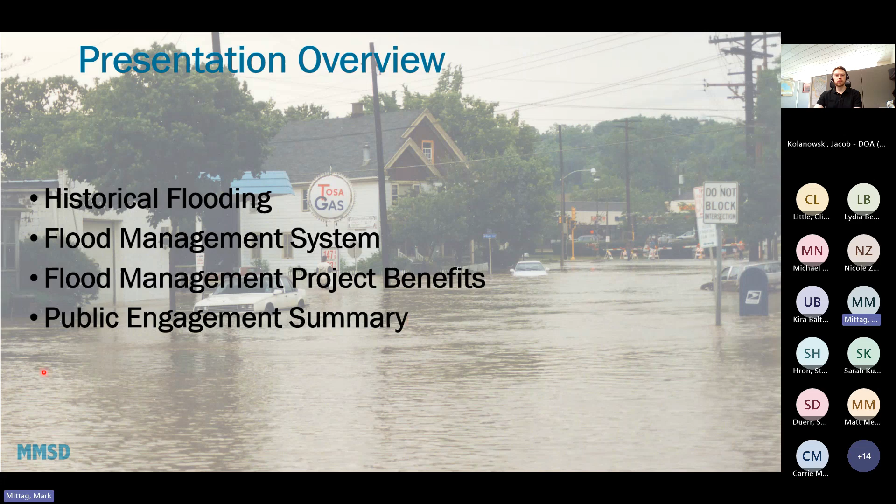The background of this slide is from 1997 flooding. Let me just grab the laser pointer. Tosa gas station in the background here. Remember that this is at 68th Street on the Menomonee River. In the background here is State Street, and we'll see how this area changes over the years.

Again, the Hart Park neighborhood in Wauwatosa has a long history of flooding. These photos are from 1997, and I'd like you to recall them in some future slides and look at other flooding photos. On the left side here, this is a neighborhood at 72nd and Chestnut, which is in what's currently Hart Park. The upper right-hand corner is the Sears Warehouse along State Street at approximately 60th Street, and lower right here is a stadium in Hart Park.

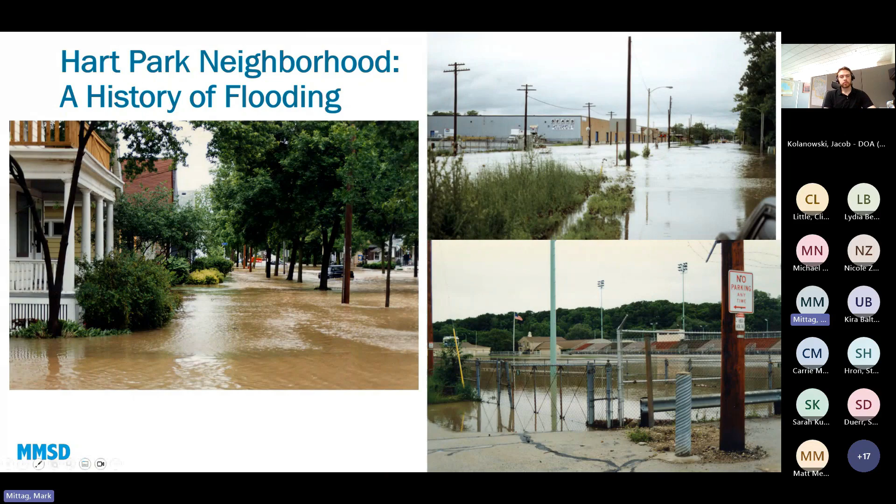This picture also is from 1997, and the 1997 flood combined with another significant flood in 1998. Really, these back-to-back flood events were the impetus or catalyst for the City of Wauwatosa and MMSD to collaborate together to reduce flood risk in the neighborhood.

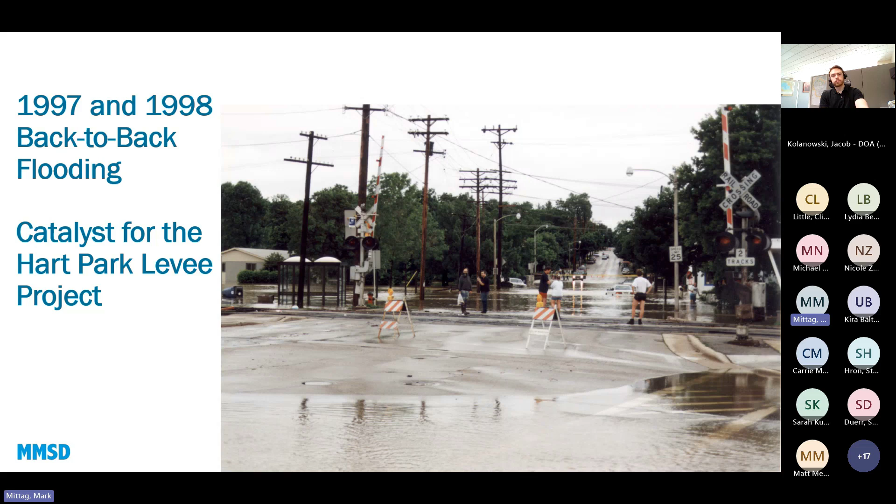To reduce flood risk along the Menomonee River, an alternative was selected that includes upstream flood storage on Milwaukee County grounds, property purchases, and levee construction. Construction of the Hart Park area levee was started in 2005, completed in 2007, and other levee segments have been constructed over the years. Currently, the last gap in the levee system is what we call the Western Milwaukee Phase 1B project, which is under construction, although we do have additional levee improvements and maintenance planned in the future.

This is an overview of MMSD's flood management system, and I'll walk through what these different features are. Further upstream, we have the Milwaukee County Grounds Flood Storage Facility. I shared a few flooding photos in the Hart Park area that integrates from Wauwatosa into Milwaukee, so we have the Hart Park and Western Milwaukee levee system, and then a separate downstream system is the Valley Park levee, which is fully completed and has been accredited by FEMA since 2006. To date, MMSD has spent over $300 million to reduce flood risk along the Menomonee River.

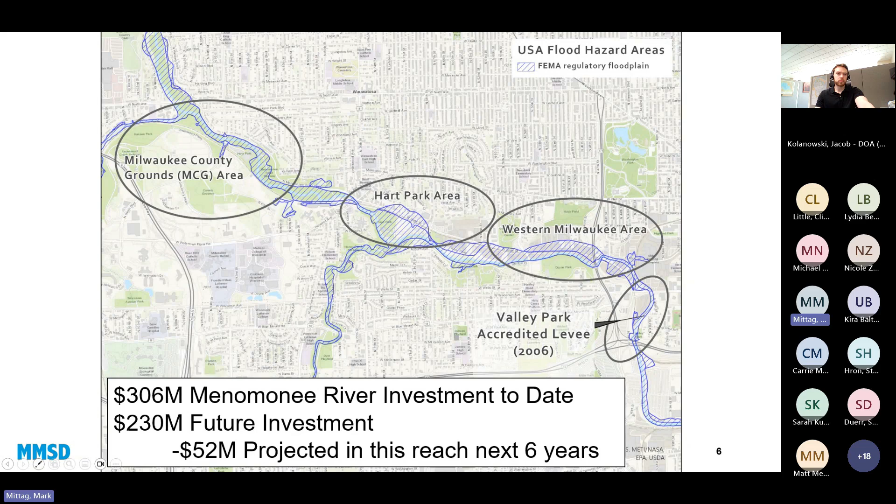There's much more budget in the future, including $52 million over the next 6 years to finish up the levee system and make some required improvements. A bunch of the additional funding beyond that $52 million is to go further up in the watershed to remove concrete lined channels, legacy infrastructure like that, and fund some additional upstream flood risk reduction projects.

So I'm going to walk through, from upstream to downstream, this different infrastructure and the benefits it provides to reducing flood risk, as well as ancillary benefits of nature and recreation that we collaborate with partners on.

This is a graphic of the Milwaukee County Grounds Flood Storage Basin. I'll just explain what it is. This is Underwood Creek. Underwood Creek flows into the Menomonee River and then downstream into Wauwatosa and the Hart Park area.

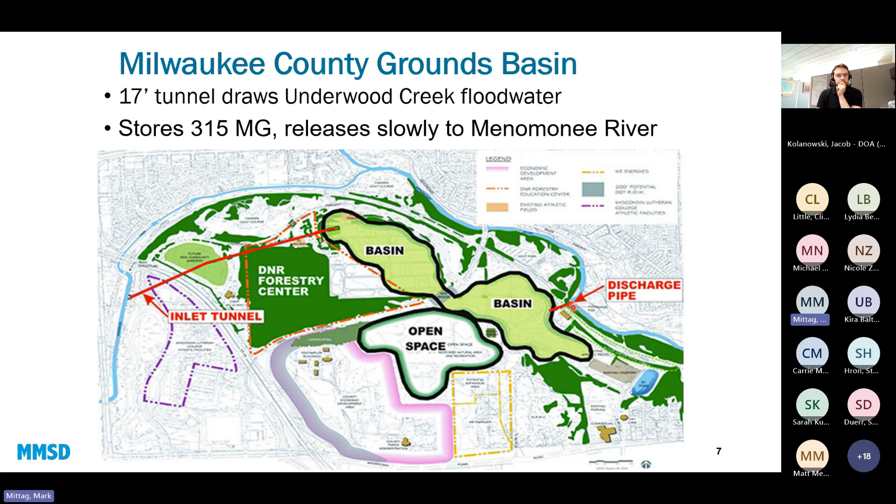There's a large inlet, shown in the next slide, and a 17-foot diameter tunnel that carries flood flows from Underwood Creek to these two large basin lobes that can store 315 million gallons. During flood flows, peak flows are taken off Underwood Creek, stored in these basins, and released slowly so that they reduce flood risk downstream.

This system worked well in the floods. The basin ended up about half filled, with 160 million gallons of storage. Some people ask why it wasn't entirely filled, and that's simply because of the way the storms hit the Milwaukee County area — the southwestern part of the county, which drains to Underwood Creek, didn't get rains as intense as elsewhere. Overall, this part of the system performed as expected.

As we move further downstream along the Menomonee River, we come to the MMSD levee system. So briefly, what does a levee do? A levee holds back floodwaters. It can be built of earthen embankment, as shown here on the left, at River Parkway and approximately 63rd Street in Wauwatosa. It can also have reinforced concrete portions, or flood walls.

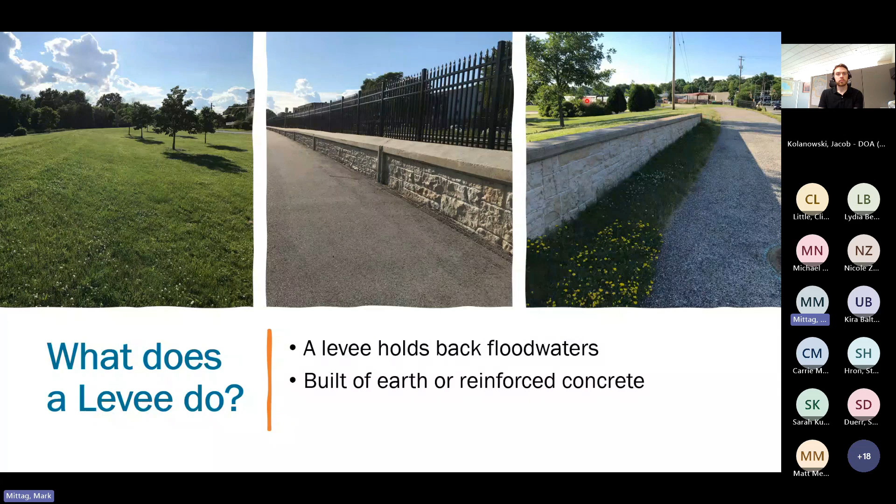This is along Hart Park Lane in Hart Park. This photo shows a reinforced concrete flood wall that transitions to an earthen levee, right in the area of that Tosa gas photo from years ago.

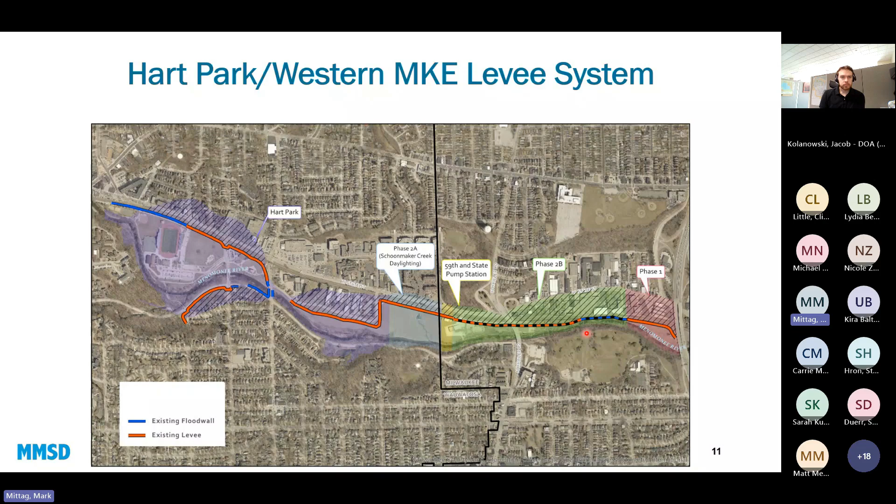Briefly, here's how the levee system works together for the Hart Park and Western Milwaukee levee system. In blue are reinforced concrete flood walls, and in red is earthen levee embankment. This is the Hart Park area, in Hart Park East, transitioning into the City of Milwaukee at this dark line. This is the Western Milwaukee Phase 1B levee flood wall project area, currently under construction. The levee system ends here at Highway 175.

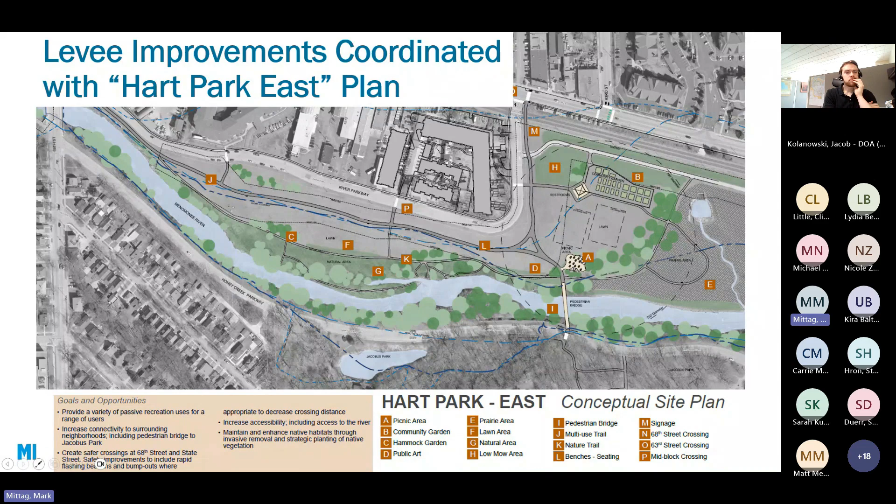During last August's flood, I just want to briefly mention some things that happened, how it performed. Overall, the system performed as expected. There was some minor levee overtopping in an area where we do have some planned improvements, and it did show some areas where we have planned improvements, and the reason for that.

This picture here is in Hart Park, right next to that Tosa gas location. It's an area that's designed to flood. This is the 68th Street Bridge, and again, where that Tosa gas picture was taken from. And of course you see here the stadium flooded. This, again, is an area that's planned to flood with the levee design.

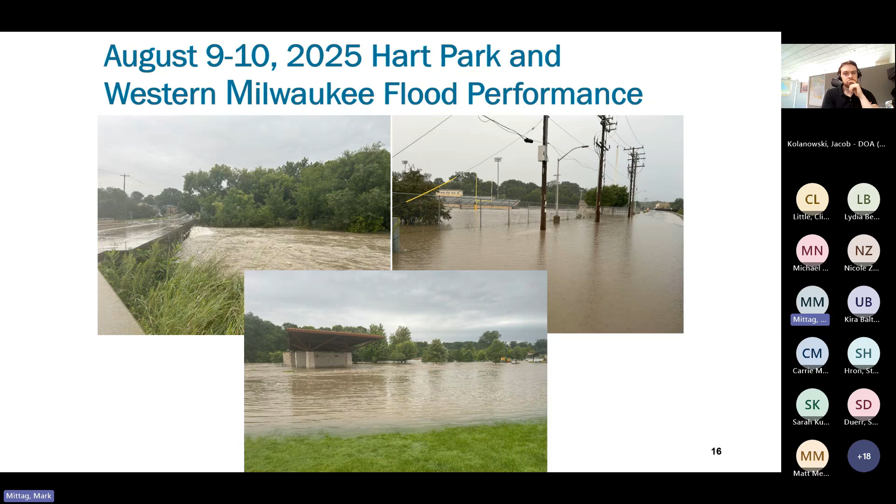One item I want to point out again is this neighborhood. This is a 72nd and Chestnut photo from the earlier flood, and this is just from last year. The picture's taken from this vantage point pointing southward. I share this photo simply because it illustrates to me the benefits of converting this neighborhood to a park area, adding the levee system, and reducing the flood risk on this neighborhood.

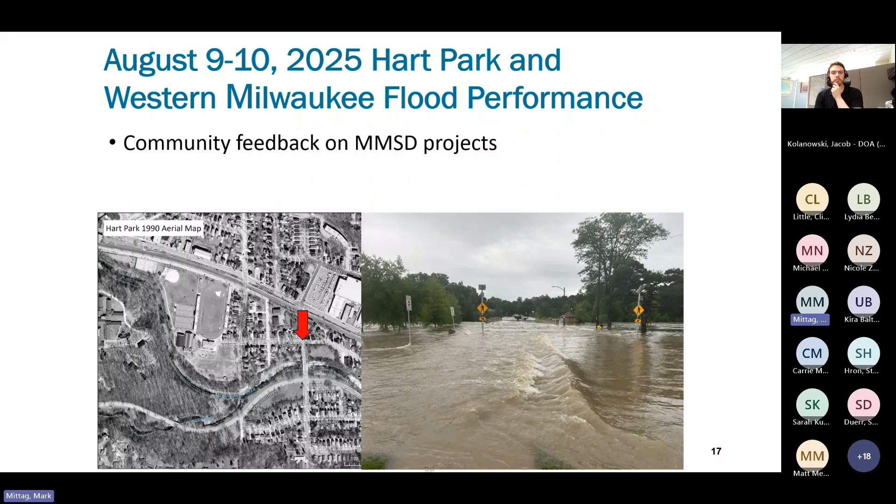And just a quote from the former mayor in Wauwatosa. I'm just going to read what she said: 'It seems like if MMSD hadn't been preparing, building, and implementing projects over the last 30 years, it would have been much worse. In a world where Hart Park was still a neighborhood, the amount of catastrophic damage would have been disastrous.' So I just wanted to share that success story.

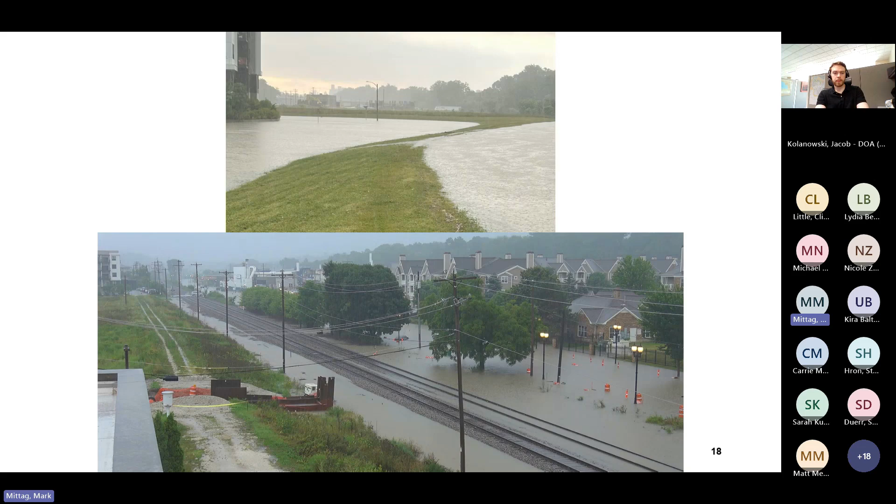A couple other photos here. I'm going to keep going, recognizing the time we're on. Again, these are areas where we have some levee overtopping, modestly, that didn't really damage the levee, and we have planned improvement there. And then on State Street on the right here, there's a project planned with Wauwatosa to reduce flood risk from the neighboring Schoonmaker Creek watershed.

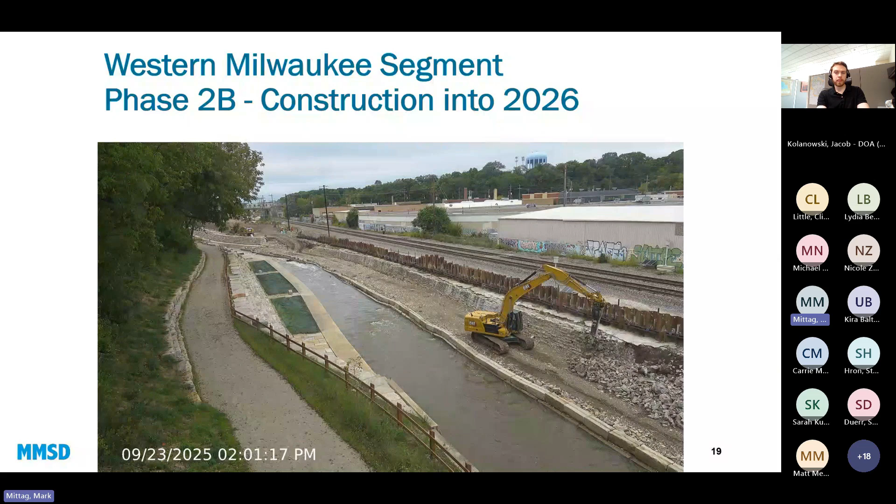I did mention the Western Milwaukee Phase 2B levee and flood wall project. This is under construction; this is a picture of that work underway last fall. That work is continuing, and we expect it to be largely completed by the end of this year.

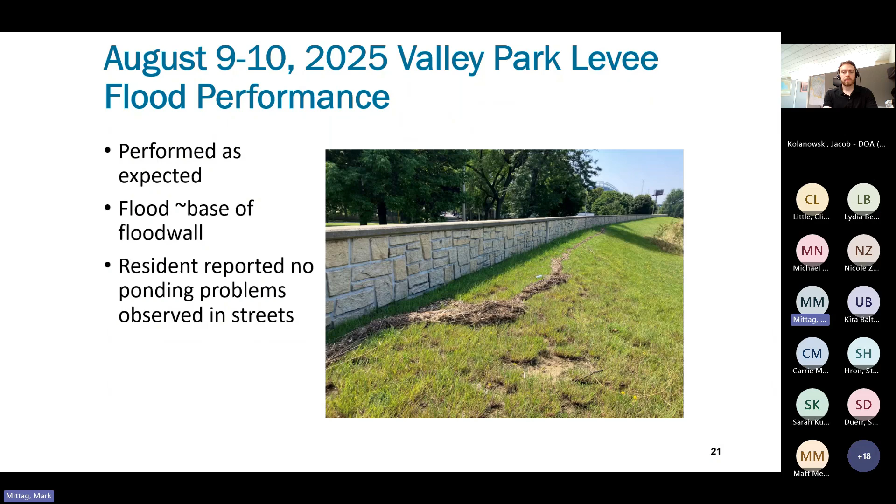The Valley Park levee system performed as expected, performed well. This graphic here shows a debris line that was kind of up to the edge of the flood wall along the Valley Park levee alignment. Flood came up to approximately the base of the wall. Residents reported on the landside of the levee that there were no significant ponding problems of stormwater observed in the streets.

We have some additional study sort of checking the standards since the Valley Park levee was completed 25 years ago. We have a sort of checkup, if you will, on the standards and levee system planned for later this year. Plus, I love sharing this photo.

Just briefly on public engagement approaches and tools that we've used on many of these projects, I want to touch base on them. We strive to collaborate on these projects with our municipal partners, Wauwatosa and Milwaukee, in the case of these levee systems, as well as county parks.

Some of the tools that we've used include postcards to the neighborhoods affected by our construction projects. Where we can, we do ask for input through surveys, asking people's opinions on certain items where we have flexibility in terms of choices of what we would implement.

And it's great to meet in person through open houses or listening sessions to explain what's planned and why we're doing that. One item I especially appreciate is our outreach team, Kate Morgan's done this for me numerous times. She'll be speaking with you in a couple weeks. Prior to construction, we go door to door making sure businesses and affected homeowners in close proximity to our construction projects are aware of what's going on, so we can raise awareness and collaborate on how that affects property owners during construction.

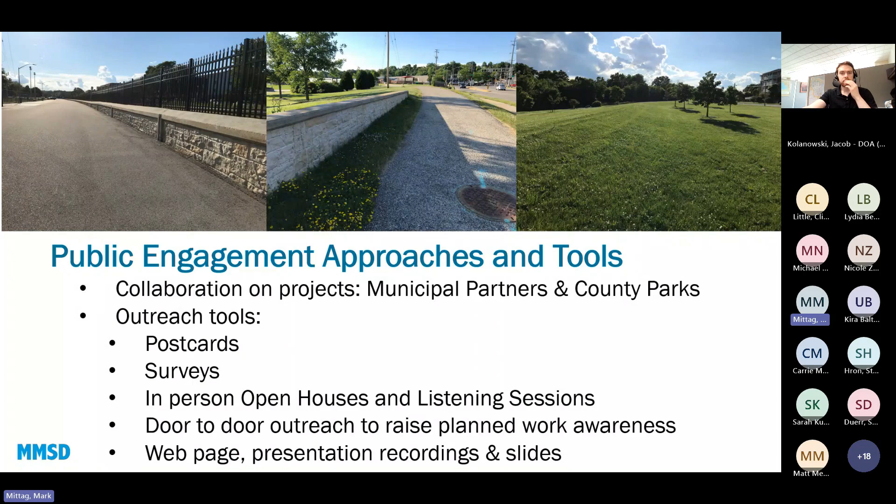And of course, we have a web page where we post presentation recordings, slides, and things of that nature as a resource easily available to people. We also find that sharing information about why we're doing what we're doing is helpful.

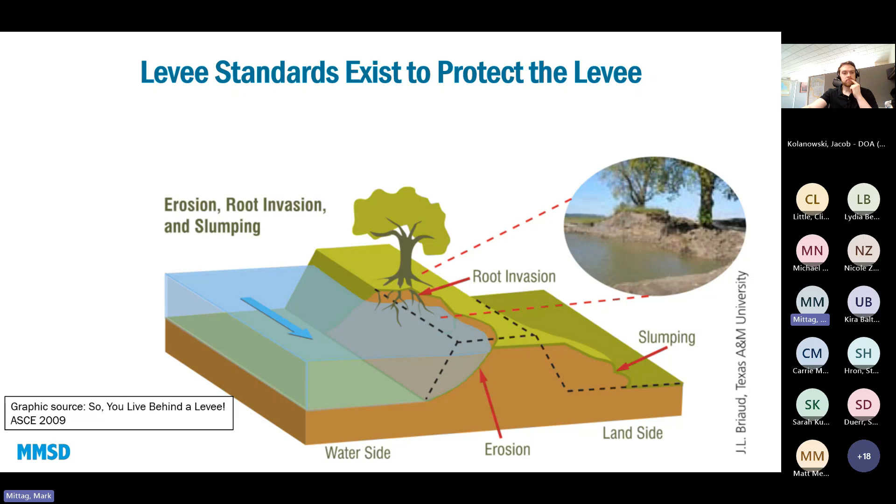This is a graphic from a sort of levee standards graphic that we've used, explaining why we've had to remove some trees that are near the levee to meet FEMA standards.

One tool I always like to lean on and really promote to our neighbors near our projects is our web page and a way to sign up for email updates. We encourage people to ask a question anytime. Each of our project web pages have a way to sign up for email updates or to leave a question or comment about the project, and we strive to get back to people within a short number of days. I know I've benefited from the questions people have asked on some of our projects — people have good questions, and having answers to them is of course important and helpful. This is just an example of one of the resources that we use.

So we're at exactly 20 minutes here, and I did want to leave some opportunity for you to ask questions, and I'll be happy to try to answer them.

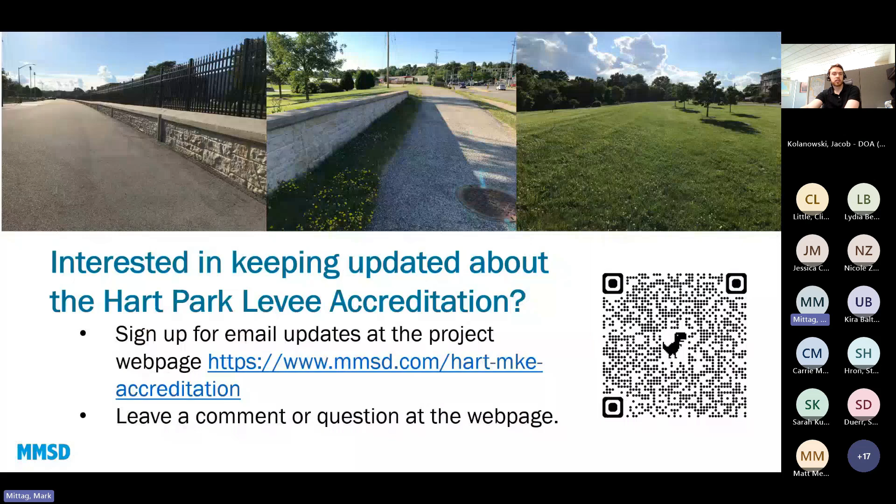Good question. I'm just going to back up to one of our graphics here — let me find one that might be helpful, something to illustrate an answer to this question. But yeah, for '97, '98, I don't recall the exact recurrence interval on those floods. I don't have a specific answer on that, but I can speak to what the levee design standards are.

FEMA's standards and expectations for levee construction are — and I like this graphic because it illustrates that purpose — that for a 100-year recurrence interval, or 1% probability flood in any given year, you find that flood elevation, and then your levee, the top of your earthen embankment or reinforced concrete flood wall, is approximately 3 feet of what's called freeboard on top of that. We made this graphic to illustrate the design flood elevation, and the top of the levee or flood wall is approximately 3 feet higher than that. That's FEMA's freeboard standard for levee design.

There are a few exceptions where there's some additional height near bridges or other structures that cross the river, but that's the general gist of it. For the Hart Park and Western Milwaukee levee system, we've strived to meet that FEMA standard. We have identified a few locations where we have to increase the freeboard, the height of the levee crest, and we're working to make those improvements.

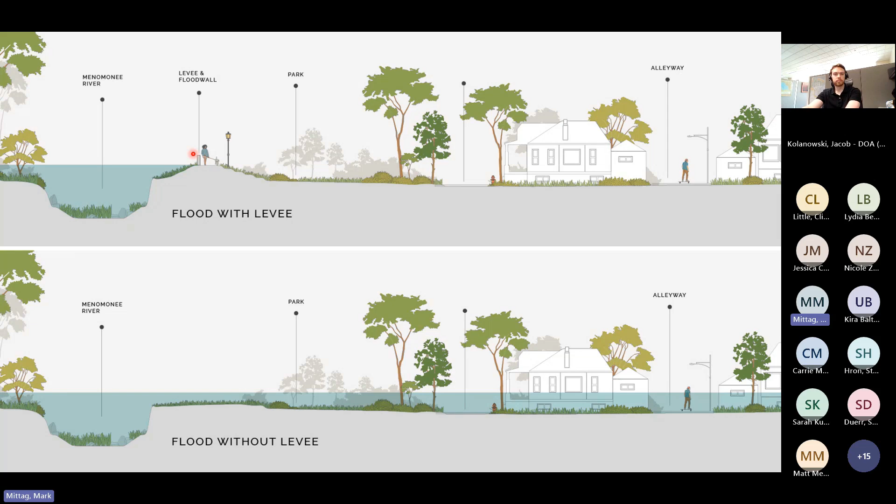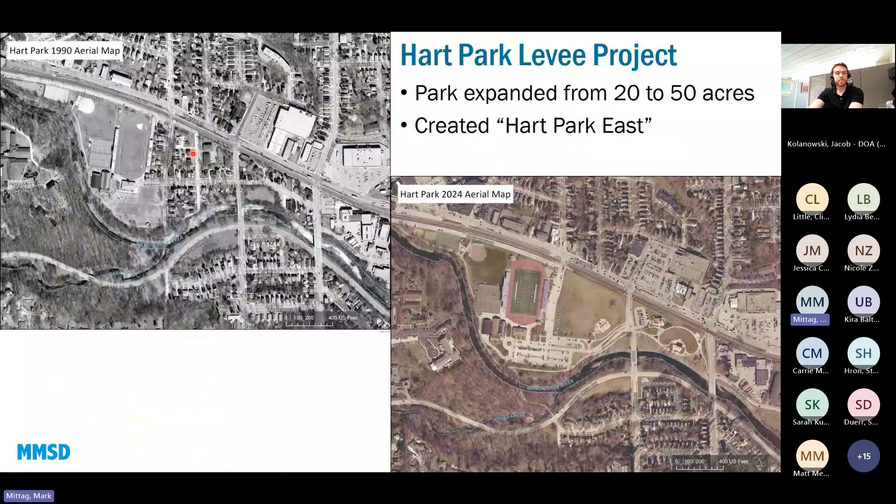Property acquisition, sure, I see that question here. Let me find a good graphic. A couple of these graphics show properties that were purchased over the years to implement these projects.

MMSD, for the Hart Park properties illustrated by this graphic, worked with the city of Wauwatosa. They led the effort on all the property acquisition. This neighborhood was flooded repeatedly in '97, '98. This was, of course, way before I was working for MMSD, but from what I understand, talking with others, generally people were supportive of a different use of their property after repeated flood damage.

So we strive to work with partners. In this case, the city of Wauwatosa took the lead on the property acquisition, and MMSD helped to fund that. I think there was also some FEMA funding for flood risk reduction and mitigation. We do have authority, if needed, to obtain property through means allowed by the law, but we strive as much as possible to collaborate and do a normal real estate acquisition process.

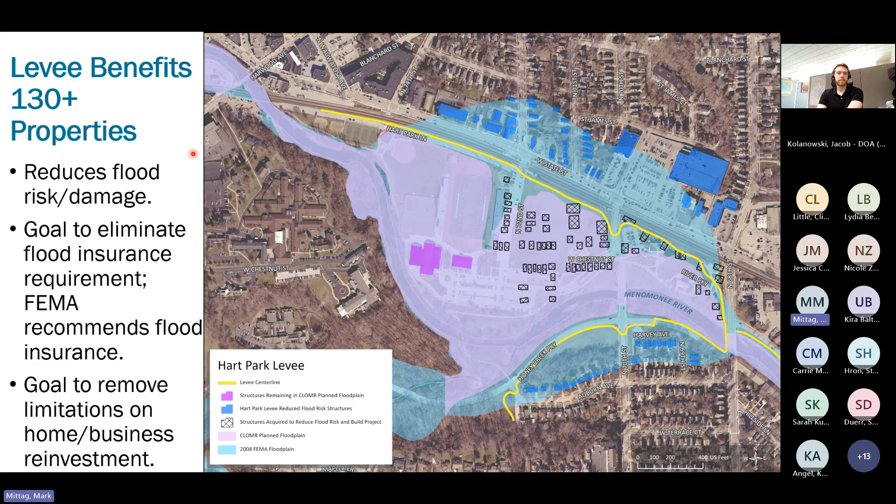I have a question for you, Mark. When you were designing these projects along the Menomonee River, I know you have a few different strategies for mitigating the chance of flood, but do you look to any other communities or programs as examples for your flood management projects, or how do you decide what specifically is needed in one neighborhood? It's a big question, sorry.

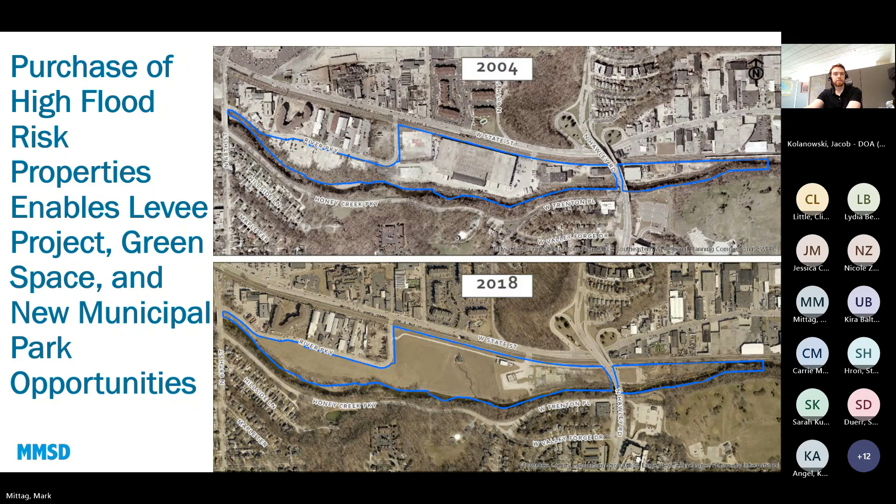Good question. I'll just go back over to Valley Park here. It starts, number one, with understanding what the floodplain is and what structures are at risk of flooding. I like showing this graphic because it shows what part of the community would be flooded without the levee system being in place. So our typical process is understanding what the risk is, number one, for flood risk, and then number two, we look at a variety of alternatives to reduce that flood risk.

Again, these projects were before my time here, but I can share what I know from the Valley Park neighborhood because I've talked with people over the years who worked on this. Valley Park had at least several alternatives that were considered. One was buying out the entire community and entirely eliminating the risk of flooding for all those properties, with much more green space. I know the local alderman at the time sat on MMSD's commission, and he really championed for the neighborhood, and was reticent that we had to buy 18 properties to build the levee in this area, but was very supportive of that over purchasing and buying out the entire neighborhood.

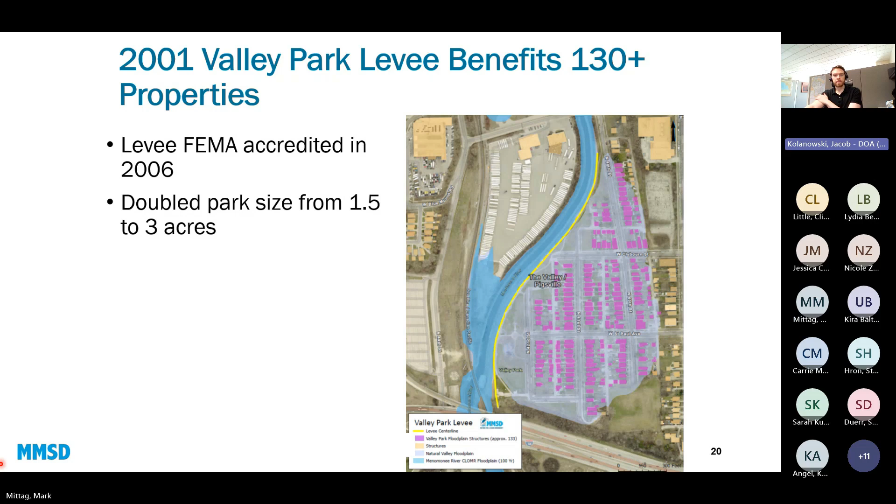Yeah, I want to say it's great that when you implement these projects, you're able to double or add park space to the area as well. You're not just mitigating the flood risk, there's other co-benefits of the projects that you're doing. So that's great to see.

Yeah, and I'll just say that MMSD, we're not a recreation agency, but we work with others who do recreation. So the city of Wauwatosa was able to transform that property acquired for the levee and reduce flood risk into additional benefits for their community. And as we work, many of the Milwaukee County parks are adjacent to rivers and creeks in Milwaukee County, so invariably they're affected by flood management projects. So where impacts to those parks do occur, or we want to mitigate those impacts, that can be a mutual benefit. That's great.